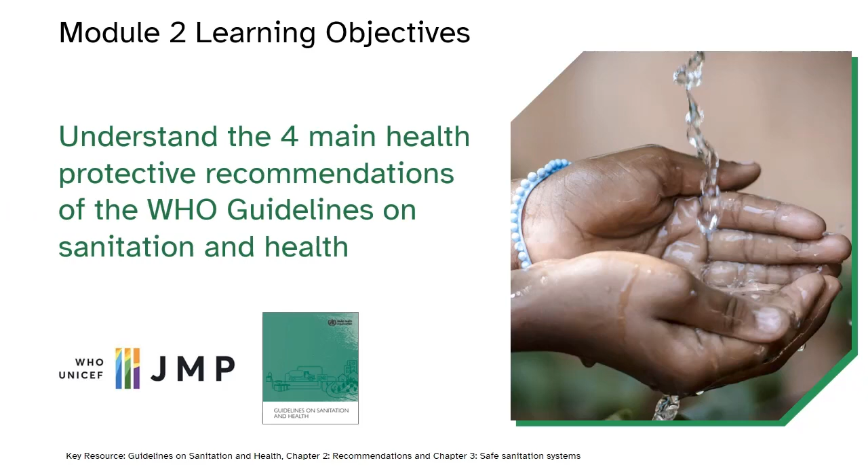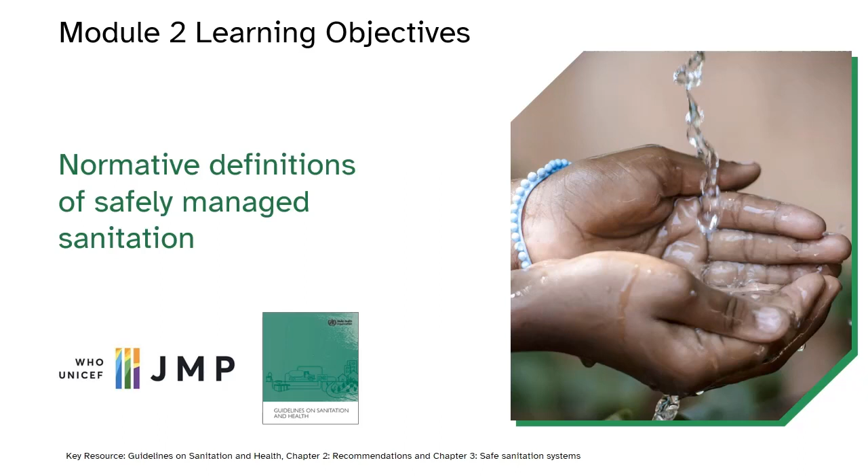You'll be able to outline ways to move up the so-called JMP ladder, including service level definitions, and analyze pathways to safely managed sanitation within your context. You'll also define safely managed sanitation at different stages of the sanitation chain, including how to find and use program definitions at the toilet, containment, conveyance, treatment, and disposal or use stages. This forms a technical grounding for Module 3, which discusses how to use definitions in country standards, regulations, and plans, as found in Chapter 4 of the Guidelines on Sanitation and Health.

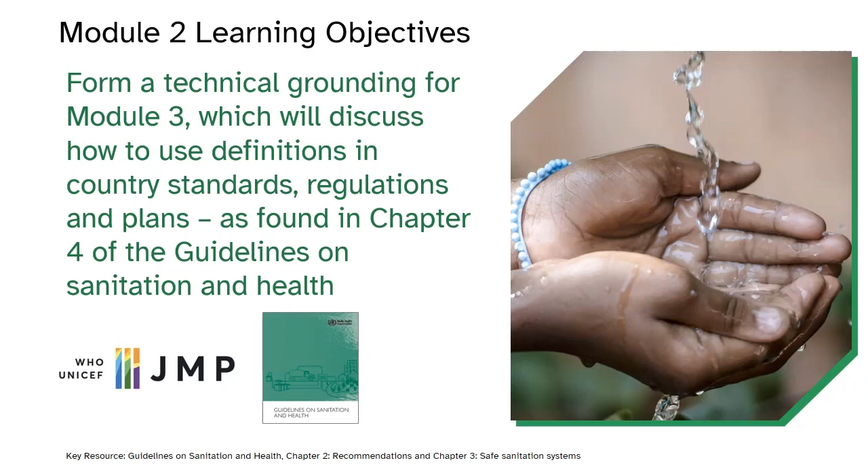It is well known that poor sanitation is hazardous to human health, either directly as a consequence of infection, or through impacts on well-being. Let's not forget that well-being is also part of the WHO definition of health.

Firstly, feces contain a cocktail of pathogens causing dysenteries and diarrheas such as cholera, which predictably recurs in areas with poor sanitation. Poor sanitation also transmits intestinal worm infections as well as typhoid, which is becoming increasingly resistant to antibiotic treatments. Poor sanitation even transmits polio, which is on the brink of global eradication.

It contributes to the spread of vector-borne disease such as trachoma and lymphatic filariasis, whose vectors prefer to breed in feces and wastewater. Secondly, repeated infections caused by poor sanitation can lead to health challenges such as stunting, impaired cognition, and anemia, exacerbating the consequences of stunting.

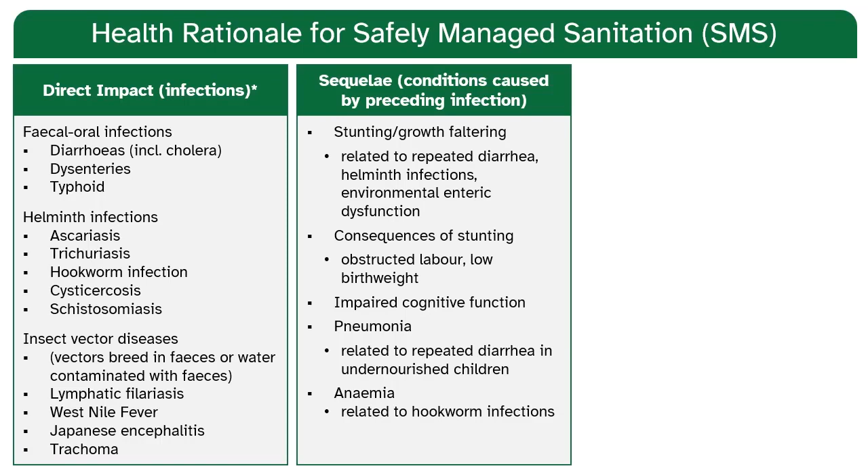Finally, lack of safe sanitation facilities in all spheres of life, at home, school, in public places, and health facilities, also leads to a range of challenges to social and economic well-being, such as loss of opportunities for play, education and work, and also anxiety and risk of assault caused by not having a safe place to defecate.

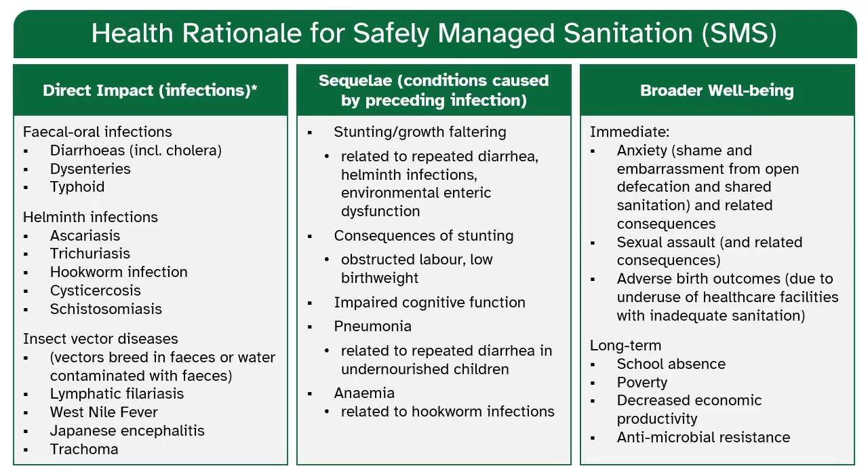Sanitation is also a human right and a public good, delivering ultimately cost-effective benefits for public health, the economy, and the environment. The human right to sanitation states that everyone is entitled to a private, dignified, safe, accessible, and affordable toilet in all spheres of life, and importantly, the right to not be exposed to the unmanaged excreta of others. The economic concept of a public good is a service that benefits all of society.

While the government is ultimately responsible, sanitation can be provided by the government, private organizations, or individuals. For such goods, users should not be denied access due to inability to pay, a situation for which smart, targeted subsidies can help. And one person's service should not prevent or reduce access and service quality for others.

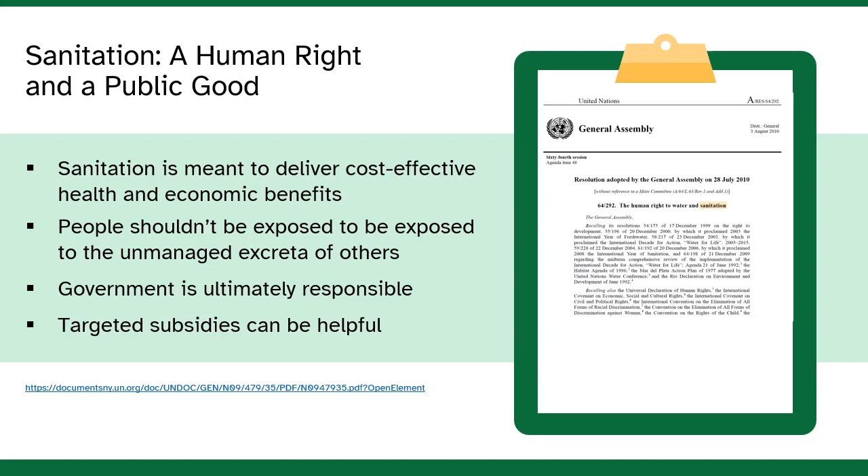Let's talk a bit more about health. Comprehensive evidence reviews conducted for the guidelines on sanitation and health show the way sanitation is implemented is not improving health as we might expect. Many sanitation interventions have been found to have little, and in some cases, no impact on health.

The reasons are myriad, but at its core, these interventions are failing to identify and interrupt the pathways of disease transmission at community-wide scale. Calls for transformative WASH seek to define and design comprehensive programs that reduce risks at all steps of the chain and thus achieve health impact.

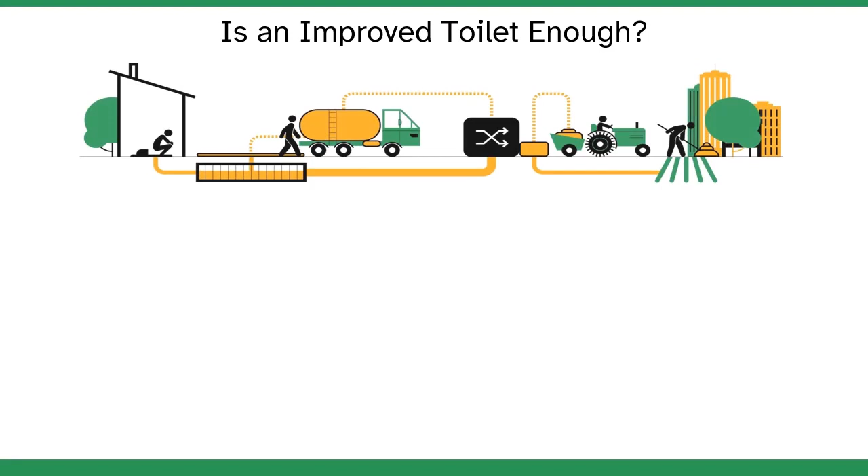Toilets are only the first step in delivering safe sanitation. Later in this course, we will introduce you to the concept of fecal sludge management, or FSM, as it is known, and wastewater treatment. However, for now, we'll look at the critically important sanitation service chain, which also illustrates that failures at any step of the chain can result in negative health outcomes.

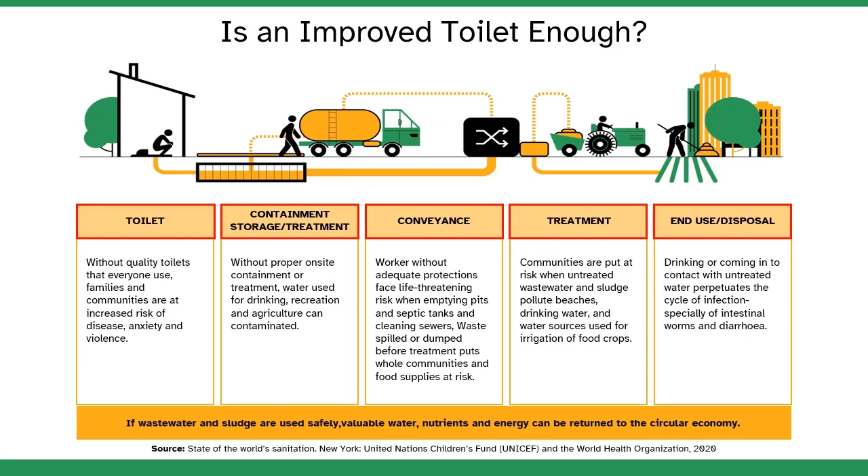Because most of this chain is outside of the direct control of a householder, it is critical that actors, including local and national government and the private sector, do their part to ensure that risks are managed along the whole sanitation service chain, from toilets, containment, to transport, treatment, and finally safe use or disposal of wastewater and fecal byproducts. As the world becomes more urbanized, this chain is more important than ever.

This is an updated version of the fecal diagram, also known as the F diagram. It helpfully shows fecal-oral disease transmission routes. An important new aspect of this F diagram is that it shows how failure at any point along the sanitation chain can lead to disease transmission.

Feces which are not disposed of or stored safely represent a health risk for humans, since pathogens in feces can be transmitted through many different routes to humans: flies, contaminated foods, unwashed hands, crops, and fluids including water. The F diagram depicts those relationships in a simple manner so that everyone can understand them.

Next, we will talk about minimizing the hazards at each step of the chain.

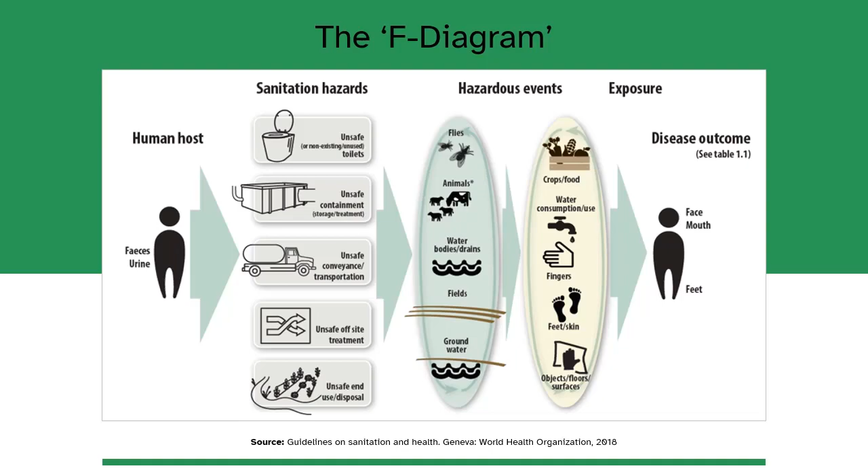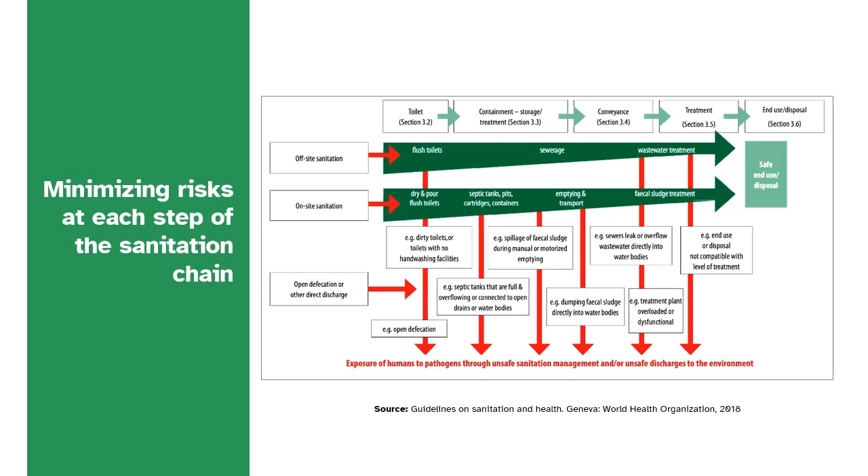Now we are looking at the excreta flow diagram, also known as an SFD, which means shit flow diagram. This diagram helps us understand the various hazardous events by illustrating where in the chain failure can occur and humans can be exposed to fecal pathogens, from toilets to containment to conveyance to treatment and end use or disposal. Hazardous events caused by unsafe excreta management can lead to exposure for humans.

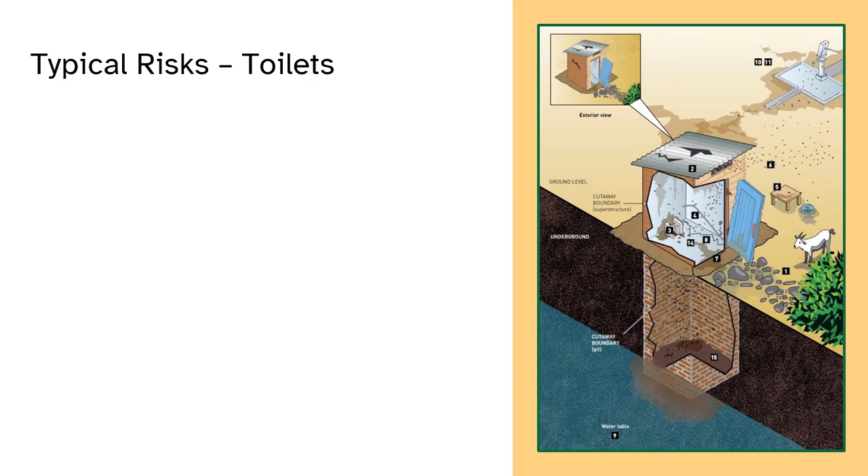Let's look at some typical risks along the sanitation service chain. We start with unsafe, unclean, unpleasant toilets that lack privacy, can bring people into more contact with excreta, and be a point of disease transmission. Or people may avoid using them and revert to open defecation.

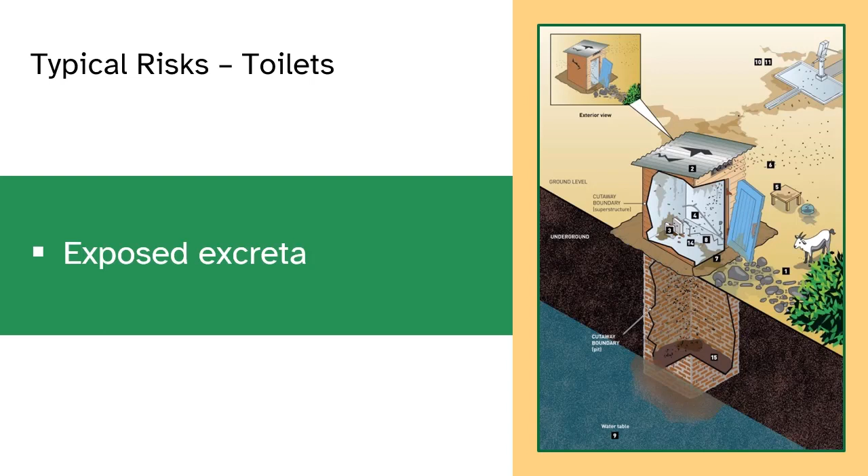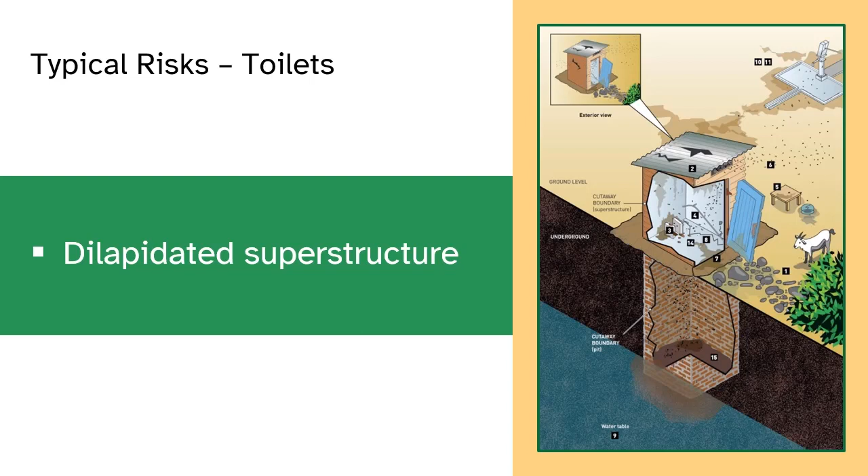In this illustration, excreta on the floor, lack of hand washing facilities, places where flies and insects can easily enter, and a poor superstructure increase hazards. As well, it may not be accessible to all intended users, and it does not appear to have anal cleansing material.

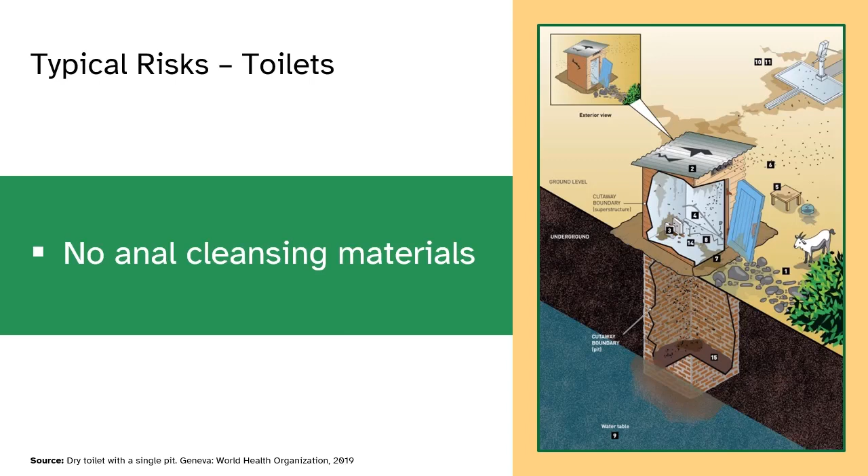Pits and septic tanks are susceptible to containment risks, such as cracks and leaks in the structure, spillage of fecal sludge during emptying, liquid effluent discharging to open ground, or washouts caused by flooding. All of this can expose humans to pathogens via contamination of drinking water, nearby food crops, and communal areas. A sanitary inspection would reveal risks in the system that need to be remediated to make the system safe.

We will discuss sanitary inspections later in the course. Some containment options, for example pit latrines in low-density areas, never need to be emptied. Instead, the pit is abandoned, covered, and a new pit is dug. Similarly, twin pits can be safely emptied and used locally after sludge is stored for an extended period of time.

However, most containments, such as septic tanks, seen here, and single pits in dense areas, will eventually need to be emptied and their content transported away for treatment. Fecal sludge must be emptied and transported in a way that protects service providers, households, communities, and the environment.

Spills, unsafe handling, and lack of protective equipment, and especially dumping of emptied sludge in waterways and on farms instead of delivering it to treatment, can all expose workers and the community to pathogens.

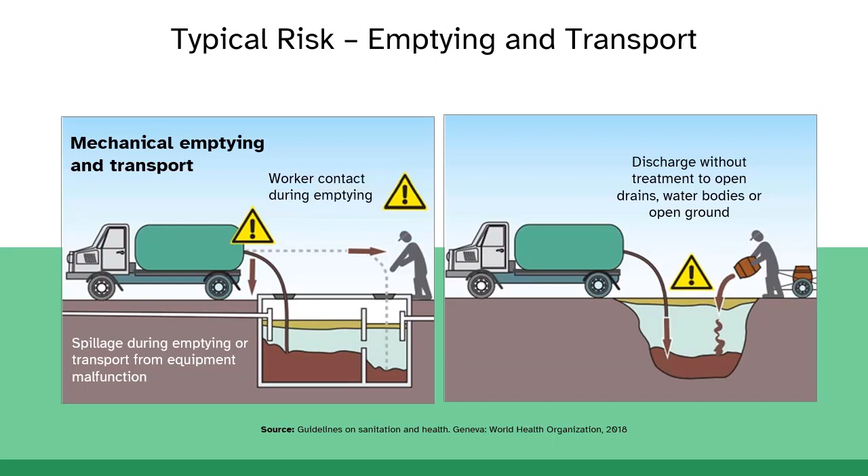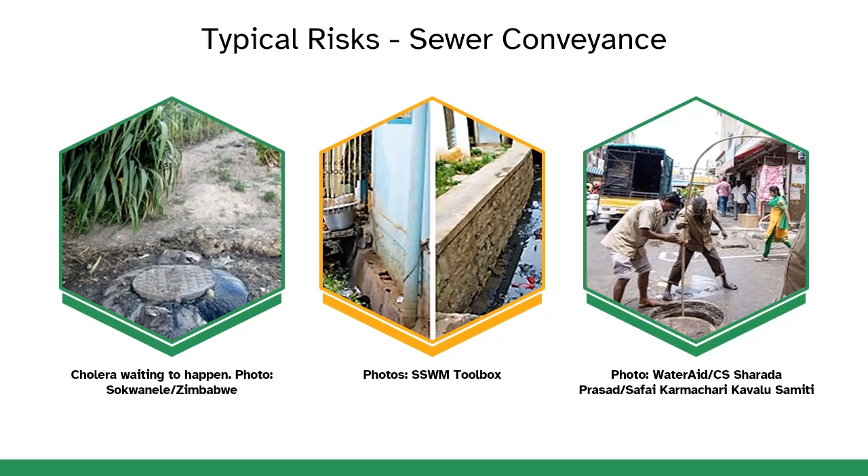Also, emptying poses potentially fatal risks to workers, such as being buried by walls collapsing in unlined latrine pits, breathing in toxic gases, and injury from garbage disposed down toilets. This is true for on-site sanitation systems, but also a major risk for workers entering pipe sewers for inspection and unblocking, who frequently face risks of asphyxiation from inhalation of toxic gases.

So based on all this, how do our approaches need to change to get better health outcomes from sanitation investments? Here, we will summarize the four main recommendations of the WHO Guidelines on Sanitation and Health.

Recommendation 1 in the Guidelines on Sanitation and Health says everyone, everywhere, needs to have and use decent toilets. So to achieve this recommendation and improve health, well-being, and human rights for all, we need to change some of our approaches to ensure the following.

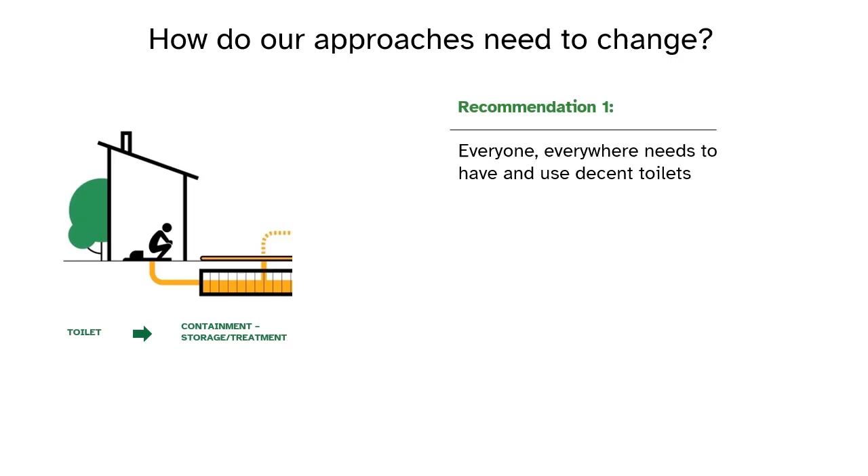Toilet use by everyone in the community. Without it, we have low or partial coverage, which means everyone is exposed to the excreta of those without toilets. No one is properly safe until everyone is. As well, the rights, dignity, and well-being are improved for those who have toilets.

Provision of at least basic toilets and containment measures of a minimum standard, so that pits or septic tanks don't pollute the groundwater or local environment.

Working on both demand for toilets and supply at the same time. So when demand is created through behavior change approaches like community-led total sanitation, we need to meet that demand by supplying safe, affordable, and desirable toilet options and toilet components such as slabs and septic tanks.

We think about all the places or settings where people need to use a toilet as they go about daily life: at home, at school, in health facilities, at work, and in public places.

While individual sanitation is a goal, in some locations shared or public toilets may be the only interim option to make sure everyone has a safe place to go, even while aiming for progressive improvement that eventually results in individual toilets for all.

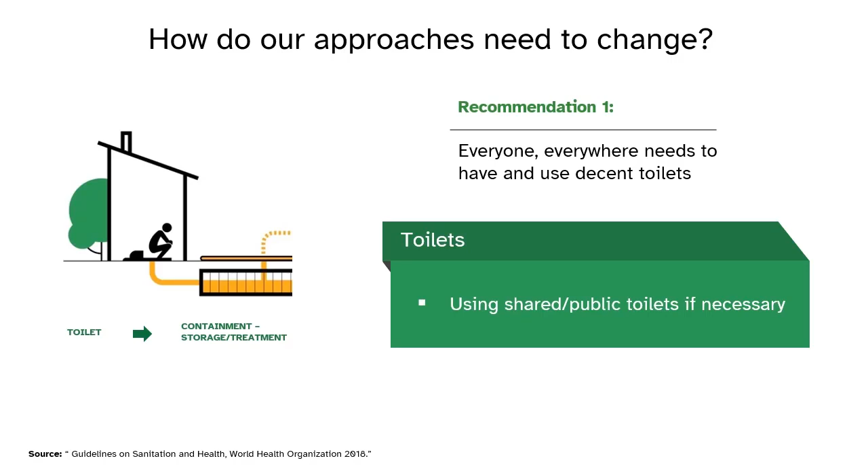Recommendation 2 of the guidelines covers the safe sanitation chain. This is where the major gains in health impact are achieved, especially in urban areas. Sanitation workers within that chain are also critically important. By focusing on more than just toilets and safe behaviors, we can develop a functioning service chain that is well managed by service providers and accountable to institutions and the people they protect.

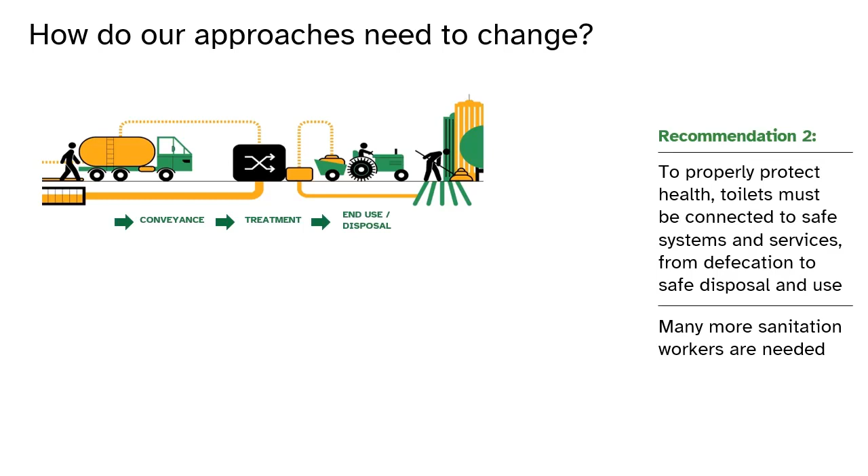What does this mean? Well, we should first consider what happens after the toilet is used, who is responsible, and what services for safely managed sanitation exist, since most of the rest of the chain is outside the control of households. We need to think about things like, does a containment provide treatment on site?

Will it need to be emptied? Is there a hatch so emptiers can access it? What kind of emptying services exist? Where will they take it? To a treatment plant or a neighboring farmer's field? Does a treatment plant even exist? Who runs these services and how much do they cost?

Remain technology agnostic. Think about what works in the local context, as there are many technologies with strengths and weaknesses depending on the context of the environment and society. Try to avoid picking a silver bullet technology or service type, and keep an open mind about technology solutions so long as they meet minimum performance standards for safety.

For this, you can review Chapter 3 in the Guidelines on Sanitation and Health. Work on the biggest risks first. Chances are there will be a lot to do, so it's important to identify the highest risk affecting the most people and to work on those first.

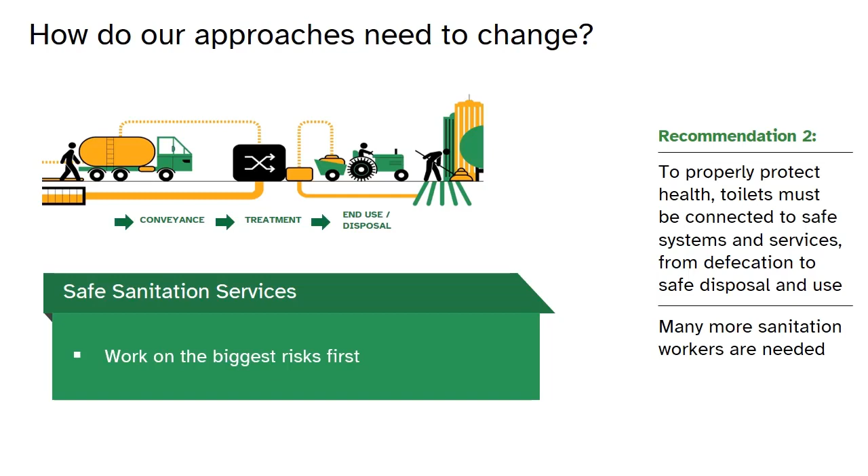In rural areas where treatment can happen entirely on site, you may be able to achieve SMS in one step. Remember to include the workers. Safely managed means people doing that management and operations work safely. We should always remember sanitation workers, especially informal ones, can suffer horrific working conditions. SMS means we will need more workers and they will need safe, dignified employment.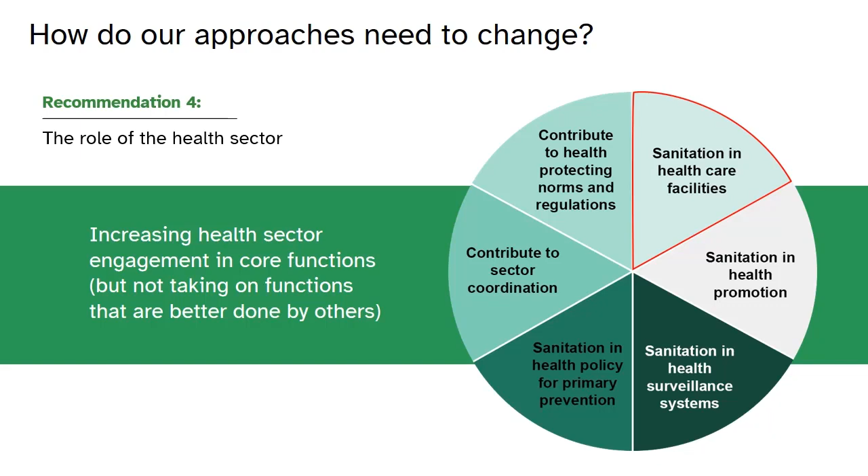Let's now move on to definitions of safely managed. Safely managed sanitation can be defined as per the WHO UNICEF Joint Monitoring Programme for Water Supply, Sanitation, and Hygiene (JMP) definitions, which are simplified for the purpose of monitoring and measuring progress against SDG Target 6.2.

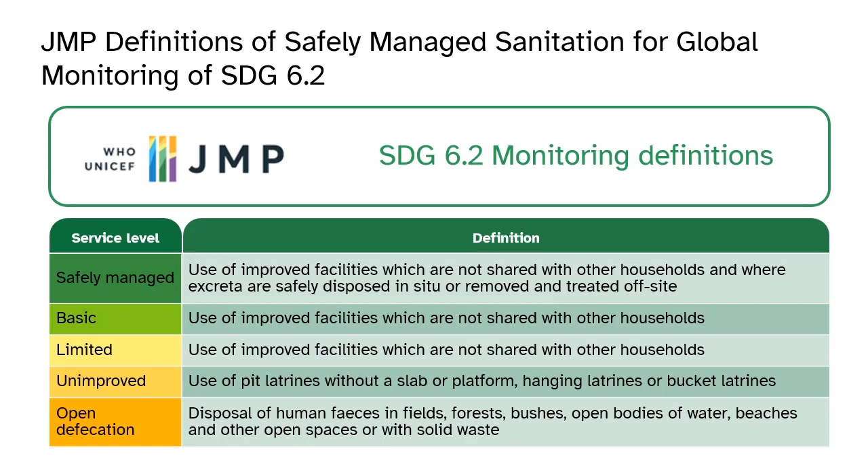The WHO guidelines on sanitation and health provide normative definitions on what safe means at each step of the chain. Those definitions are much more comprehensive and relevant for the purpose of programming. Both the JMP and guidelines definitions are aligned and complementary. Remember, global monitoring is only part of what will be relevant for monitoring locally.

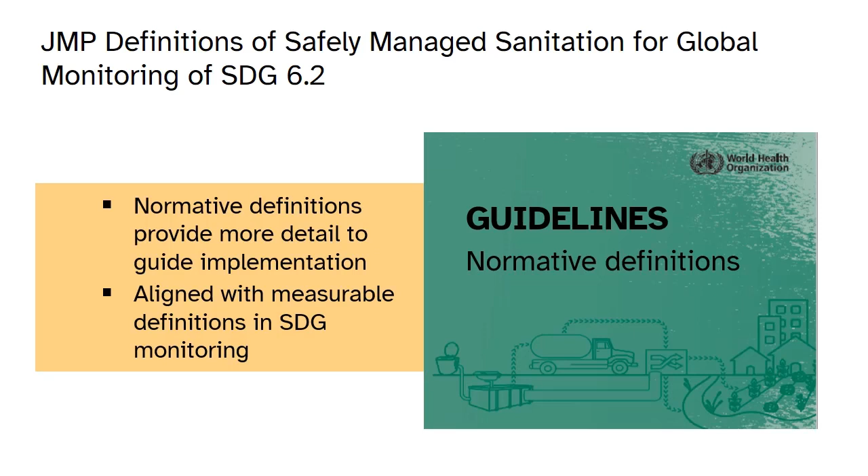Safely managed sanitation is a new rung on the JMP service ladder. To be defined as safely managed, people need to be using an improved sanitation facility that isn't shared, but also which ensures that the excreta collected remain isolated from human exposure. And there are 3 ways that excreta can be safely managed.

They can be transported through sewers to a treatment plant. We call that wastewater treated offsite. They can be emptied from containment such as pits and septic tanks and conveyed to a treatment plant. We call that emptied and treated offsite. Or they could simply remain in the ground when a pit is abandoned or empty after extended storage, for example, in a twin pit system, and safely disposed or used locally. We call that treated and disposed of in situ.

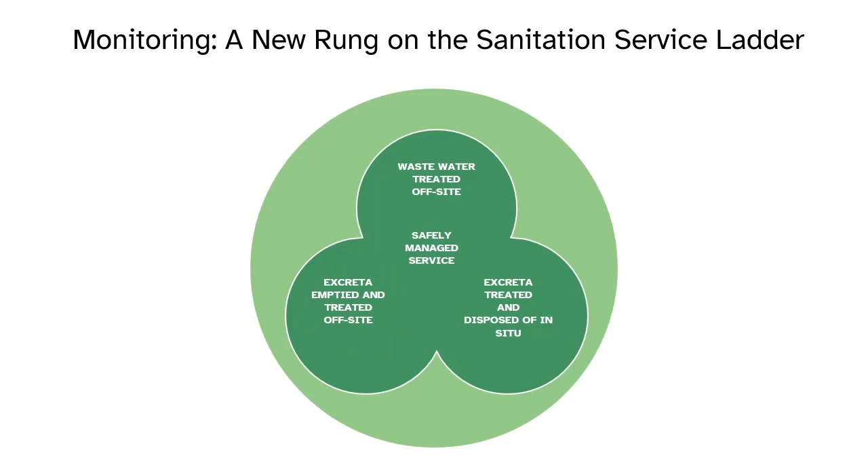The previous slide showed safely managed sanitation, the goal at the top of the JMP service ladder. Just below that is basic sanitation facilities, which are improved sanitation facilities that are not shared by other households.

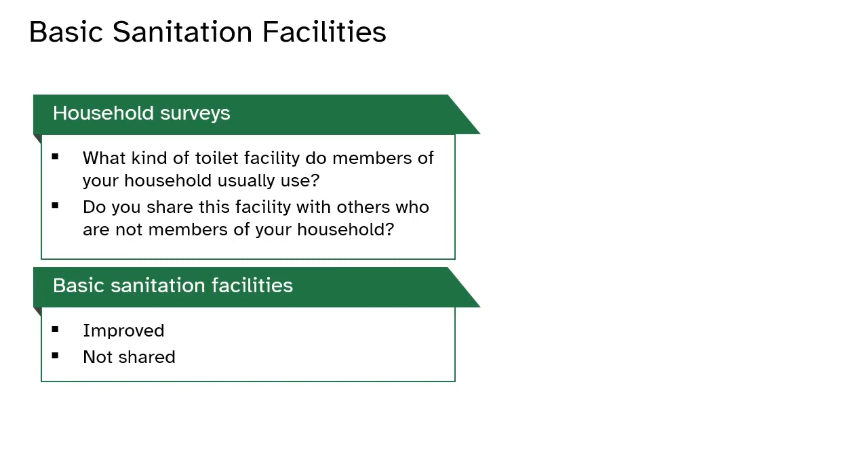As part of the monitoring process, household surveys used for data collection ask whether residents have improved or unimproved facilities, and what kind. The JMP focuses on data collection for all service levels and the 3 types of safely managed sanitation. However, an important focus is on safely managed on-site sanitation, referred to often by the acronym SMOS, to fill large data gaps and find better ways to collect data on containment, transport, and treatment of fecal sludge.

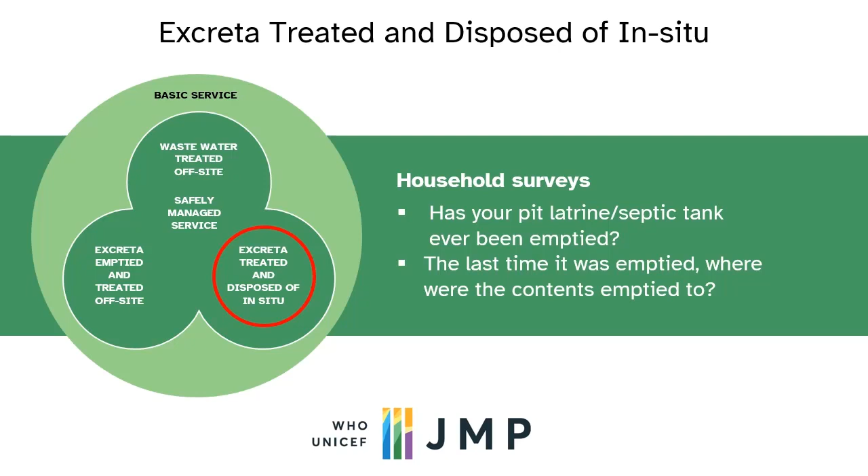But in the absence of such data, the JMP assumes that 100% of latrines and 50% of septic tanks provide effective containment. Containment also impacts emptied and treated offsite, so can be assessed with an inspection of the on-site storage system, asking questions such as: Is there an effluent line? What does it connect to? And others, as part of a sanitary inspection.

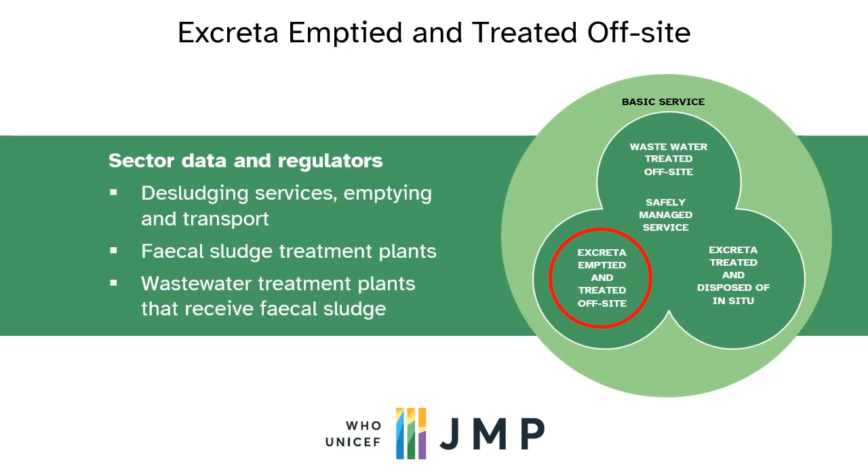An evolving area of evidence collection concerns excreta that is emptied and treated offsite. Data coming from households about emptying is necessary but not sufficient to determine emptied and treated offsite status. From the households, we can get the proportion of households that report excreta being removed offsite. These are considered potentially safely managed, but only if there are data on transport and offsite treatment.

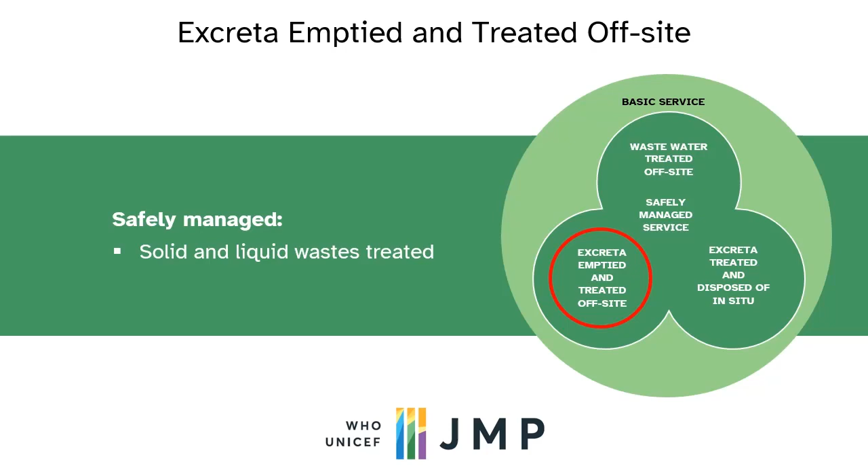Wastewater treatment is something that many countries have some data on, and the JMP counts secondary or higher treatment for the safely managed sanitation indicator. Primary wastewater treatment doesn't do much to wastewater except remove solid material that will either float or readily settle out by gravity, and doesn't count as safely managed unless there is a long ocean outfall that removes the excreta from risk of further human exposure.

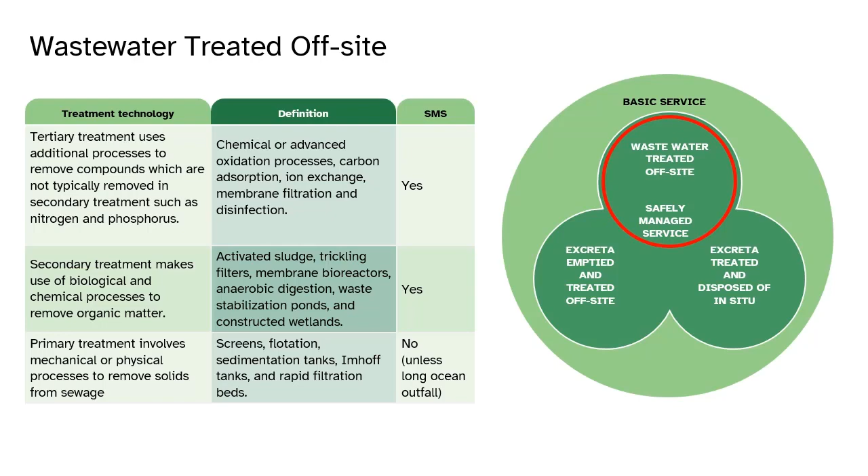So the JMP gets data on sewer connections from household surveys and censuses but relies on administrative data for information on treatment. Sometimes that data is only available in urban areas or only reflects treatment plant design rather than actual operating conditions. Finally, it's known that some of the wastewater flushed into sewers never reaches a treatment plant, either because of leaks or overflows, but it's very hard to get data about this.

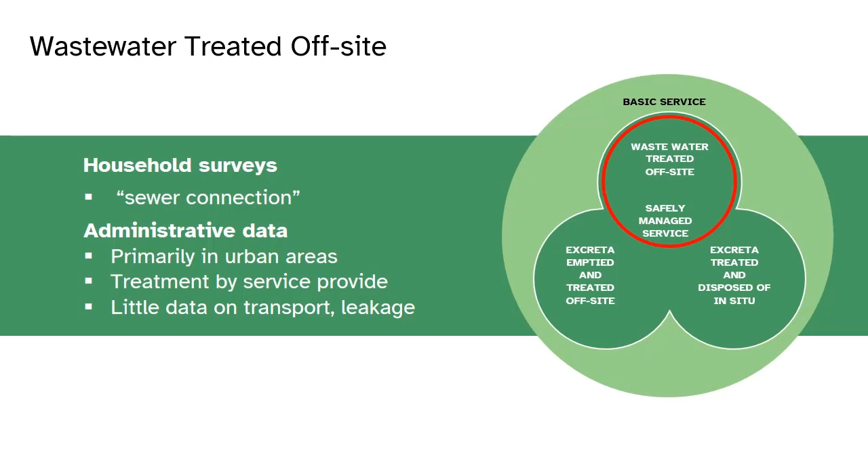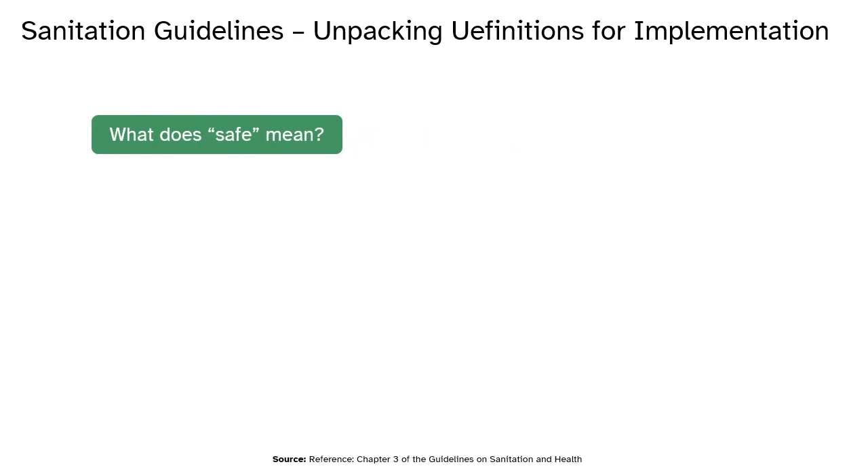The next series of slides follow from the toilet all the way through to end use or disposal. They summarize the definitions for safe management in the design, construction, operation, and maintenance of the service, and incremental measures that may be considered if meeting this definition is not achievable in your context.

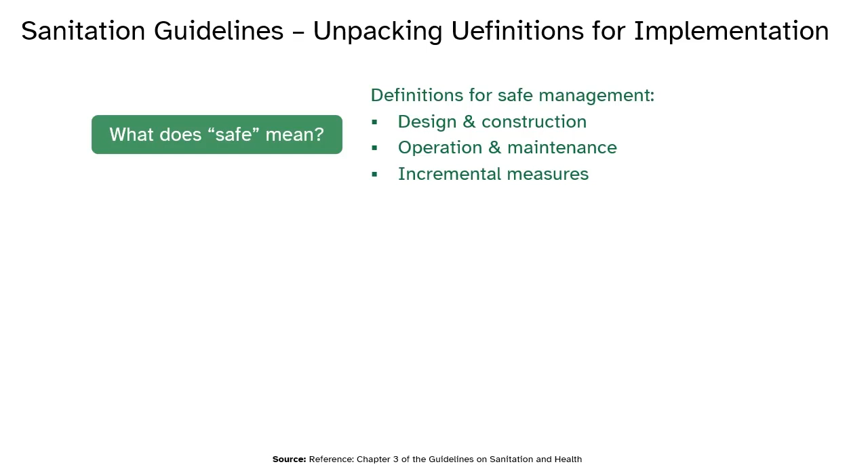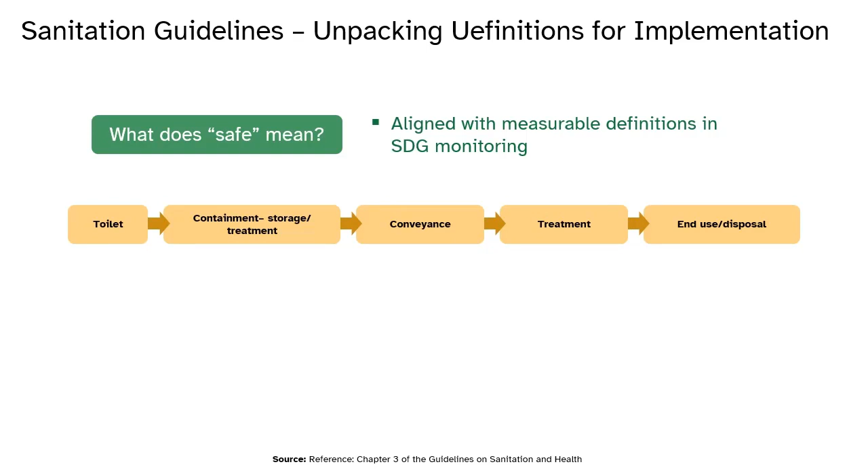Normative definitions are helpful because they provide more detail to guide program implementation and are aligned with measurable definitions in SDG monitoring. An important thing to note is these definitions are not strict engineering designs. Instead, they are minimum performance criteria to guide existing designs and new innovative design solutions. For more details, you can consult Chapter 3 of the Guidelines on Sanitation and Health.

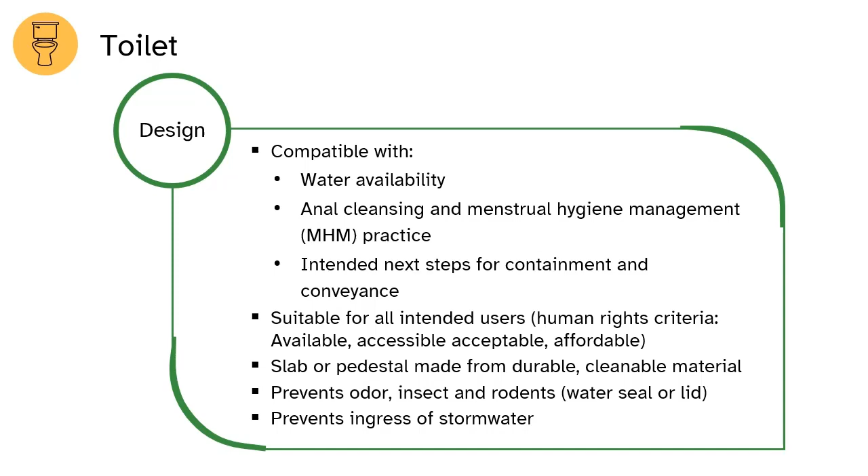A safe toilet is one where excreta are captured in any type of durable, cleanable, pest-proof seat, slab, pedestal, pan, or urinal that is compatible with local water availability and cleansing method and the intended containment type. The key principle for safe toilet management is that design, construction, management, and use ensure users are safely separated from excreta, avoiding both active contact, for example from soiled surfaces, and passive contact, for example via flies or other vectors. Toilets should be maintained through regular cleaning and replenishment of supplies.

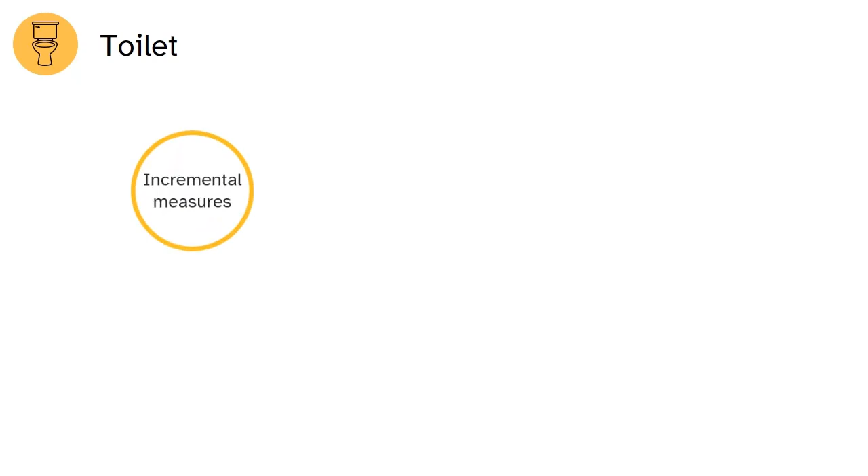Shared, public, emergency, and institutional toilets should have additional features for privacy, safety and hygienic management, such as sex separation, locks, lights, menstrual hygiene bins, disability access, and a formal management and maintenance system.

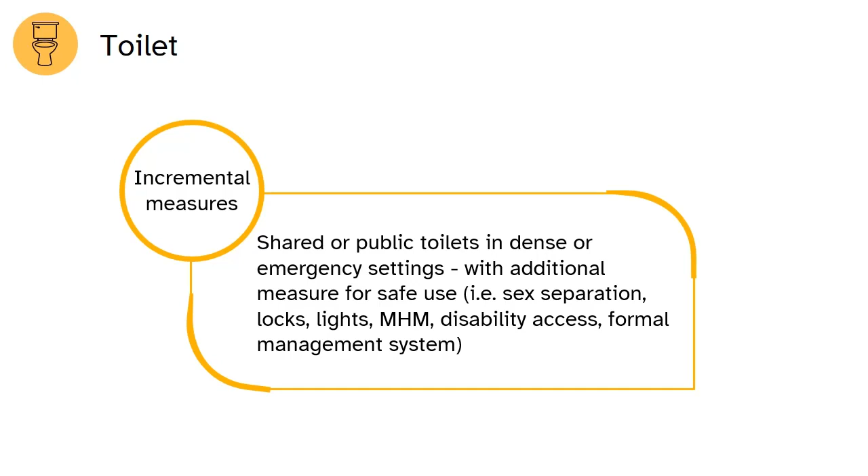The containment step is relevant to non-sewer sanitation systems and solids-free sewer systems where sludge is captured at the household and only liquid effluent enters the sewer. Containers are usually pits, septic tanks, and holding tanks and vaults located below ground.

Safe containment stores and, in most cases, provides some treatment to excreta and wastewater from toilets. Safe designs capture sludge and release liquid to groundwater in permeable pits or adjacent leach fields, or to sewers in the case of solids-free sewer systems.

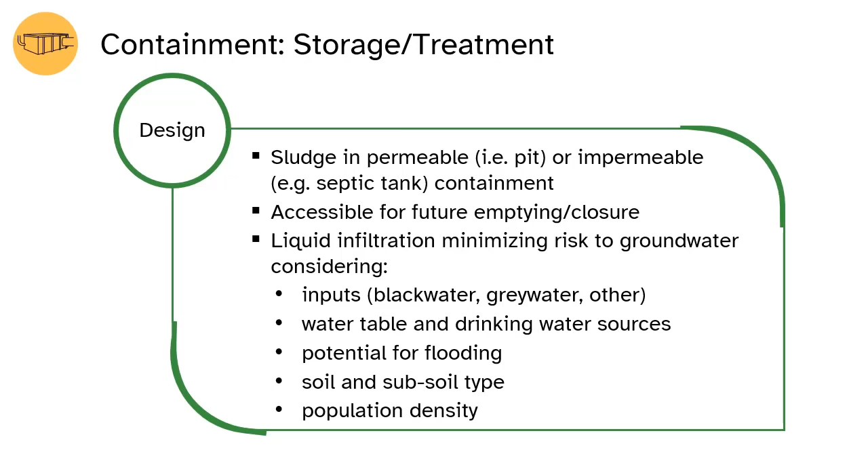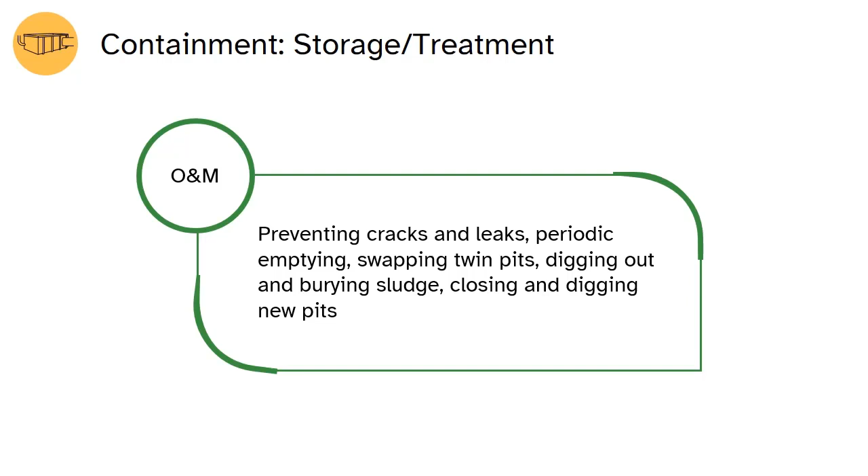Safe containment is not damaged and doesn't release sludge or liquid effluent to open ground, open or covered drains, or pollute local drinking water sources. Contained sludge must be periodically safely emptied, as discussed on the next slide, or abandoned when full.

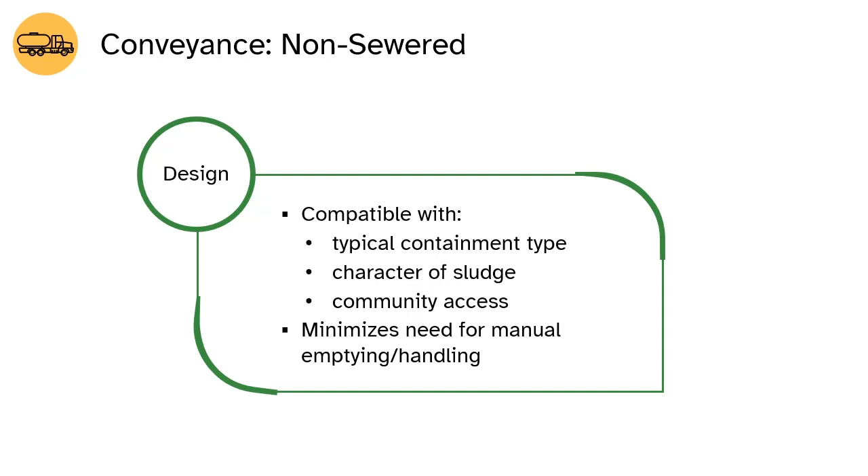Conveyance moves wastewater or fecal sludge from a containment technology to off-site treatment and/or end use or disposal. Conveyance systems can be piped sewer networks or manual or motorized emptying and transport, normally via truck and carts. Safe conveyance protects workers and delivers wastewater and sludge to treatment with minimal losses, meaning preventing overflow of sewage, dumping, landfilling, and direct agricultural use of sludge.

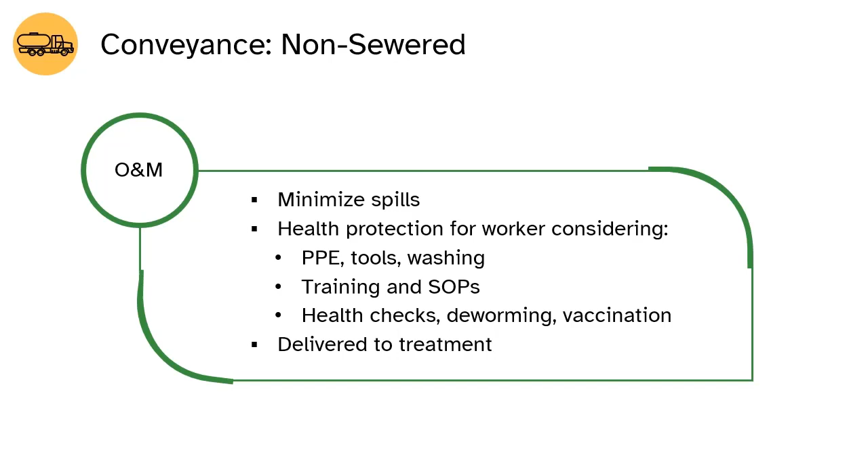Trucks discharging sludge into sewer lines rather than going all the way to the treatment plant is not ideal because it leads to blockages, but it is considered an acceptable incremental measure.

Treatment refers to the process or processes that change the physical, chemical, and biological characteristics or composition of fecal sludge or wastewater, using a range of technologies, so that it is of a quality fit for purpose for the intended next use or disposal.

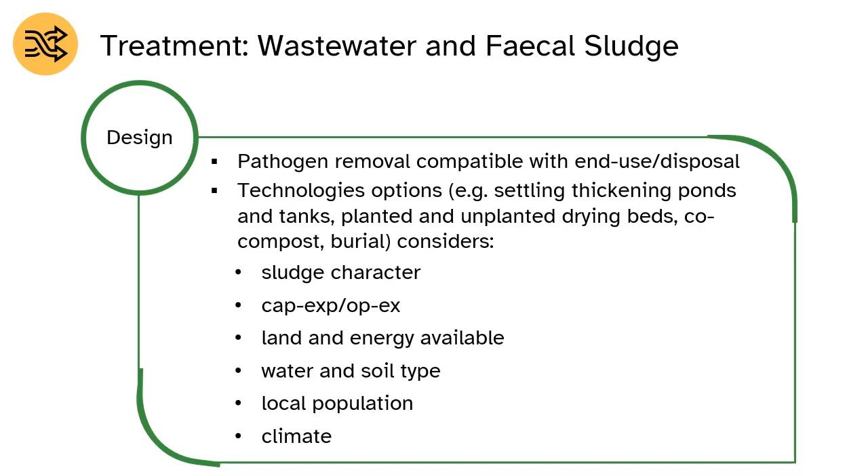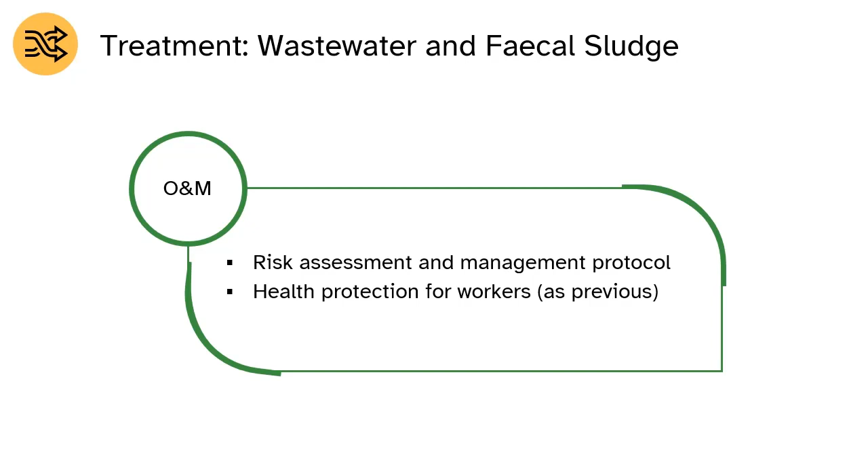For example, wastewater and sludge disposed in high exposure environments, such as swimming areas or agricultural fields growing crops eaten raw, will need higher levels of treatment than waste disposed in a low exposure environment, such as long ocean outfalls, incineration, or forestry. Treatment should consider what additional barriers are in place at the end use or disposal step, and follow a risk assessment and management process, such as SSP discussed in Module 4, to ensure consistent performance and protection of workers.

End use or disposal refers to the different technologies and methods by which treated products are ultimately discharged into the environment, either as end-use products or reduced-risk materials.

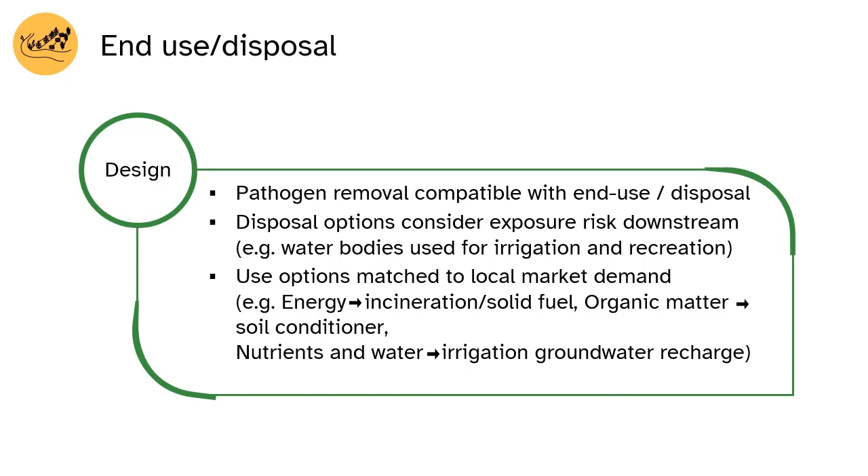Where there is an end use for treatment products, ideally fully treated wastewater and sludge are ultimately produced and can be applied or used, for example, as an agricultural fertilizer. Otherwise, additional risk-reducing barriers are needed, or the product should be disposed of in ways that are least harmful to the public and environment.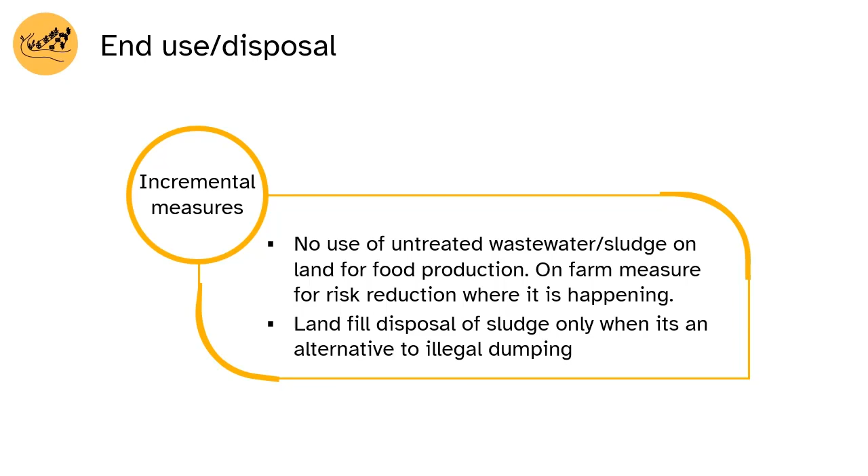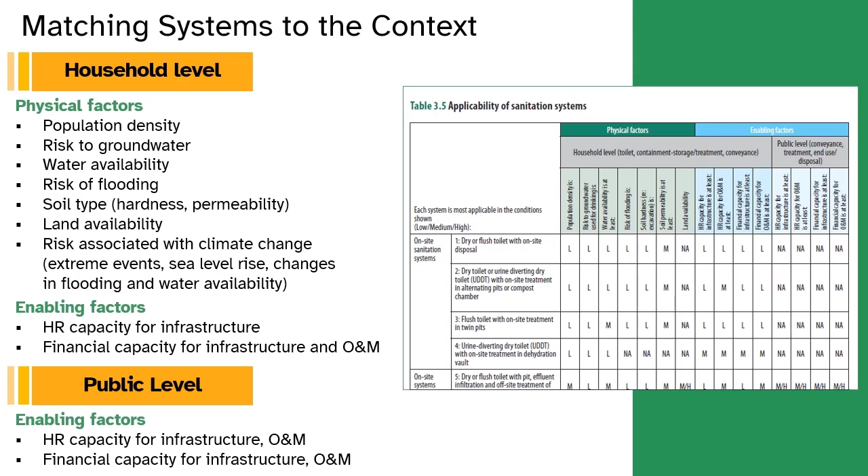Critically, risks associated with climate change, such as extreme events, sea level rise, and flooding, need to be considered. Also, enabling factors at the household or public level, such as human resources or financial capacity, will impact the management and sustainability of the system type.

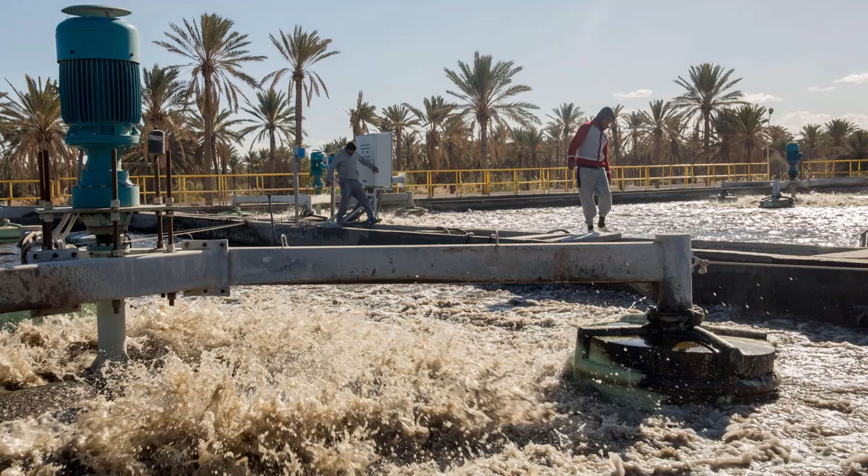We've come to the end of Module 2, the health rationale and definitions for safely managed sanitation. We've seen the main WHO recommendations for health protective sanitation and definitions for safely managed sanitation, SMS, to adapt to your context. A few key messages to remember.

First, SMS is needed to achieve health gains from sanitation. Second, since SMS is mostly outside the control of the household, public and private actors need to play their part to achieve a safe sanitation chain for all.

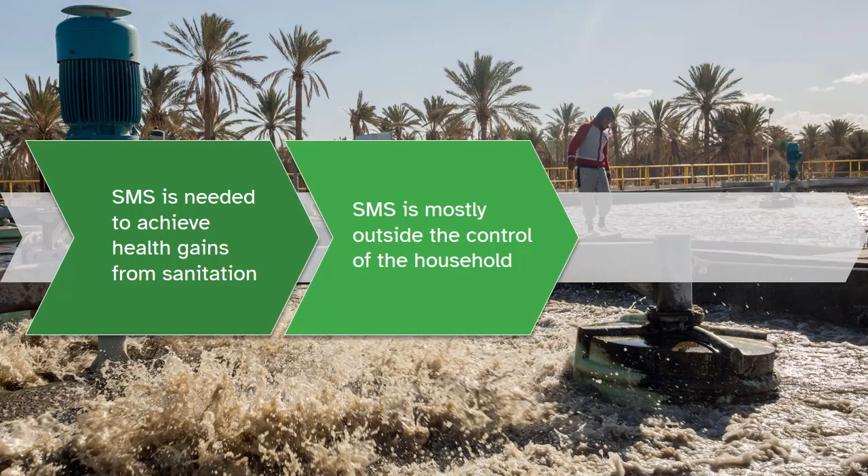Third, the definitions for safely managed sanitation in the JMP and in the guidelines on sanitation and health are complementary. The SDGs or JMP definitions support targets and global monitoring, while the guidelines support sanitation program implementation with additional details and context, as we saw when looking at the sanitation service chain.

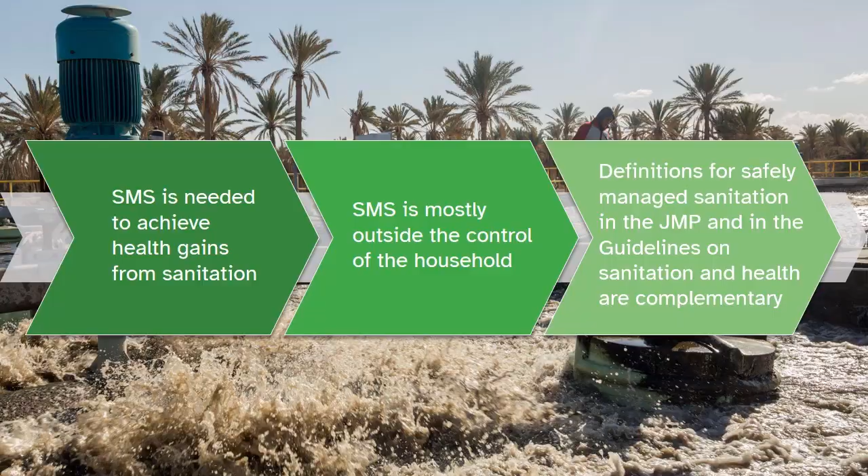And finally, more information is available on all the aspects presented in today's module in the Guidelines on Sanitation and Health, Chapters 1, 2, and 3, and on the JMP website, www.washdata.org.